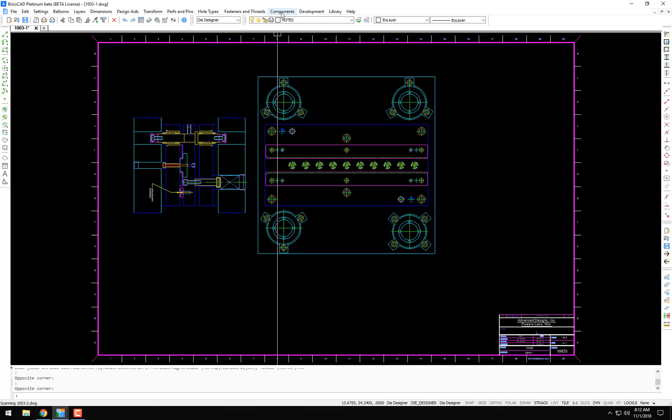I did an earlier video using die springs, and this is similar, but Lee springs certainly have a different function than a die spring. So you can find Lee springs in the components menu, scroll down to Lee springs, or type LEE at the command line.

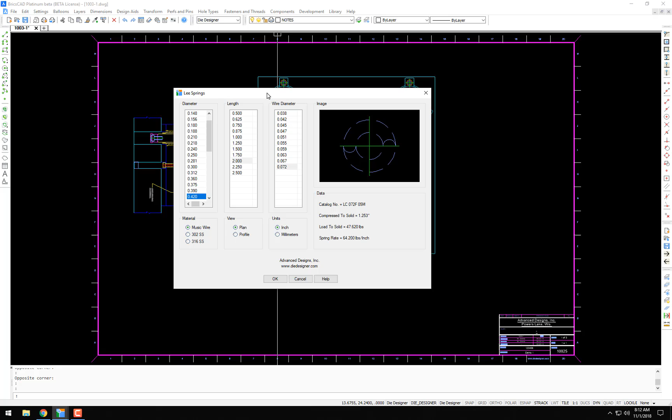That opens the dialog box. Just to run you through this a little bit, we have our various diameter list, our length list based on the diameter selected, and then our wire diameter. A 059 is going to give us a little more spring force as opposed to the 026 wire diameter.

So your views - currently we're in the plan view. If we were in the profile view, you'd see this change to the profile. And the data information over here is based on the spring you select.

It spits out your catalog number, your compressed to solid height. So this is a 250 length - let's go with a longer length here. You'll see it compresses that 1 inch long spring, compresses to 317 to a solid, and the load to solid is only 3 pounds, and the spring rate is 4.2 pounds per inch of compression.

We also have a few material types: music wire, the 302 stainless, and the 316 stainless. We'll just stay with the music wire.

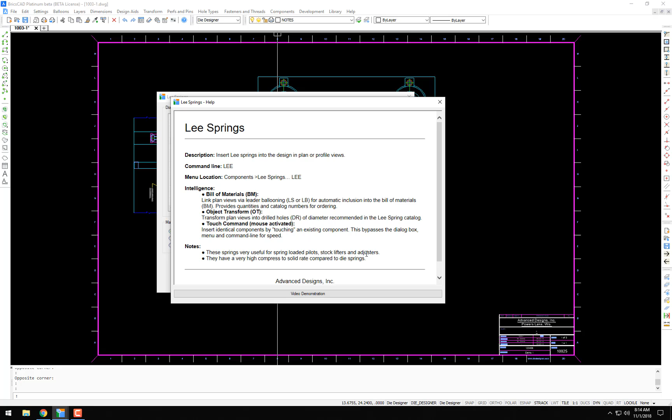A couple notes: these springs are very useful for spring-loaded pilots, stock lifters, adjusters, where they have a relatively lighter force compared to a die spring. But where you don't need that force, but maybe you need a lot of travel, these come in real handy.

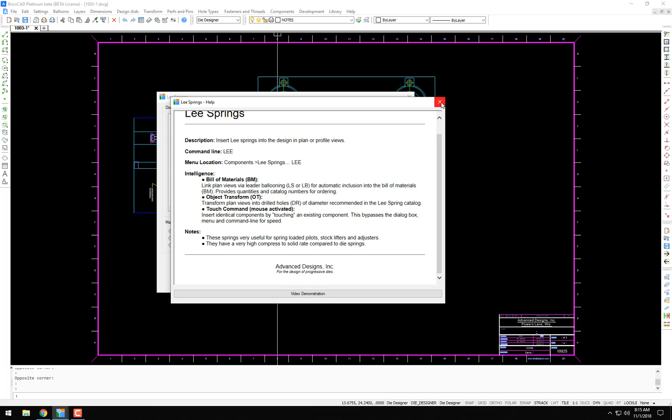Also, we have a video demonstration button, which will bring you to this YouTube video should you care to watch this video again. So let's get started. I'm going to cancel out of here.

I'm going to start in my profile view. What I am going to do is I have a pilot lifter already drawn in with a unified screw plug or screw cap behind it. I'm going to use a Lee spring for this.

So first, let me get a dimension here. We got a 453 tap drill size on this unified, so we need a spring smaller than 453 diameter. So, Lee.

Let's scroll down to, let's go with the 420. Let's just start out with a 2-inch length. I don't know what that'll be, but at the insertion time we can change that.

And let's take a look at our wire diameters. Let's go with the 059, and we're going to put it in the profile view. Click OK. Spring insertion point, I can either snap to the center of the unified or snap to the center of the bottom of this pilot spoolie.

Compressed length, that's from the menu, but we don't know. We're going to just bring it right down to here and draw it in.

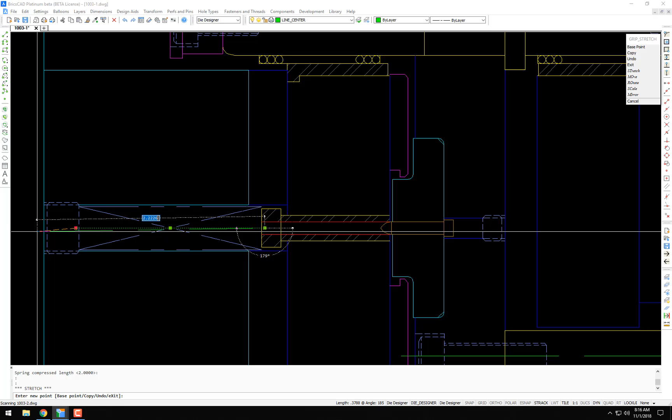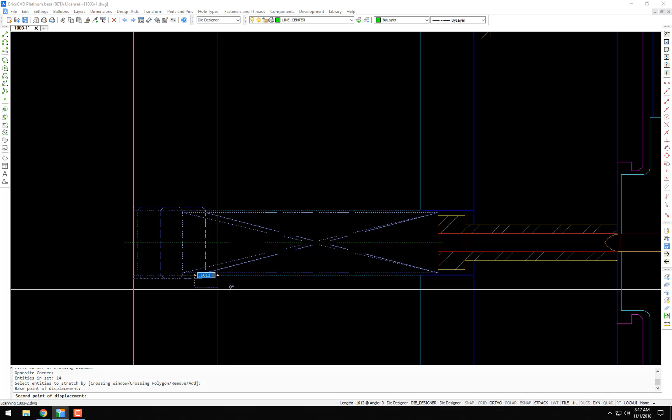So let's see what this length is here. This is 1783, plus the 1/8 inch of preload, plus the travel. So we're pretty good there for a 2-inch spring. I could certainly stretch this and adjust this accordingly, but I think we're really good there.

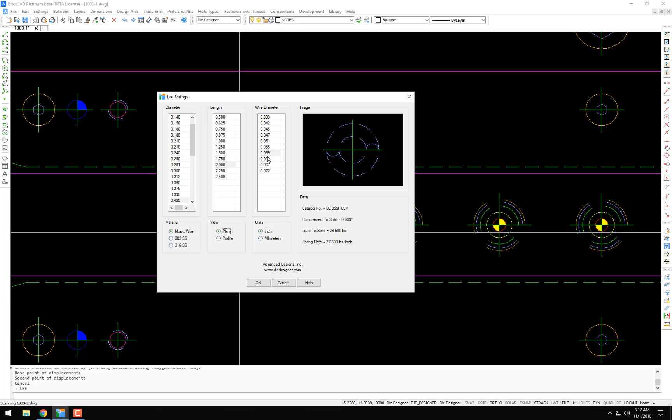So based on that, we're going to go over to our plan view, start Lee spring. We're going to go to the plan view, and you can see the 420, the 2-inch long, and the 059 wire, and we're going to insert it. So yeah, kind of cool there.

I can use the touch command, just put the cursor over the spring and click a mouse button and pop them in. Let's see here.

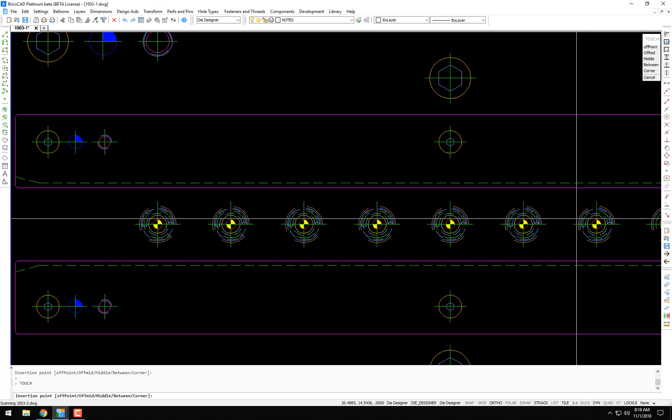Now they're drawn in. I'm going to quickly put one of these Lee springs in behind this spring-loaded stub pilot. So I'll get a dimension: 201 tap drill size, and 285 and 5/10.

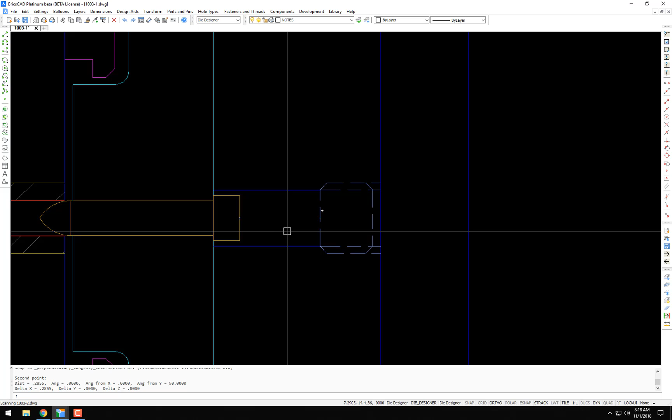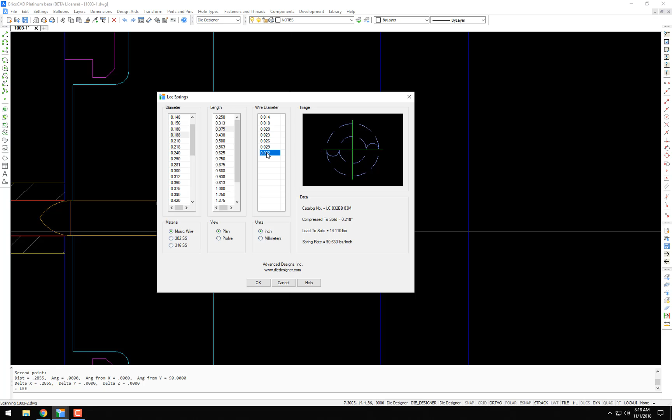Lee, what did I say that was? 201. So we'll use a 188 diameter spring, and let's call it 375 long. Let's make it as stiff as we can. Compressed to solid at 218.

All right, let's draw this in the plan view real quick. Snap to center, snap to perpendicular. Yeah, and it draws it in. Let me see what that length is. 285.

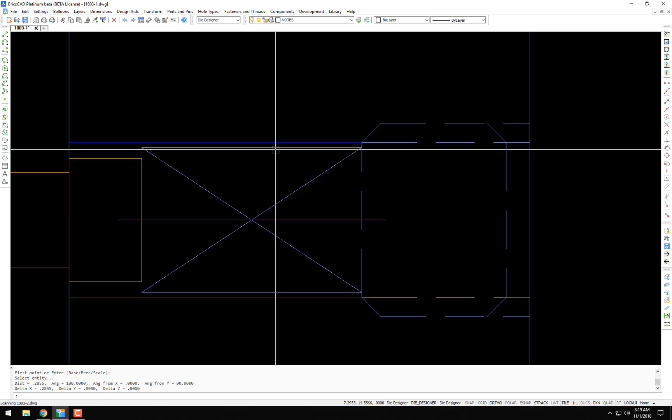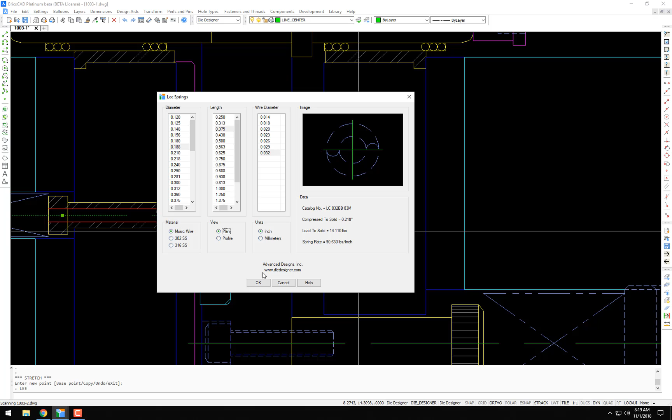So I know our compression's good on that. Just a little cleanup here. So now I could put it, if I was on the top view where these pilots are, which I'm not, but if I was, then I could just pop that spring in behind the pilots and the set screw.

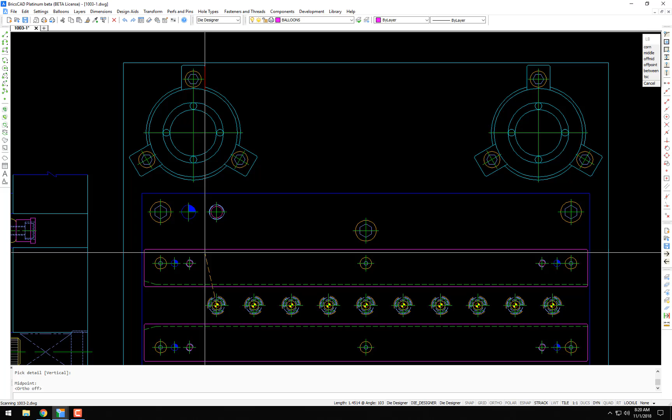So let me do a quick ballooning of this to show you the bill of materials information. We'll go to leader balloon, use our split leader balloon, starting with balloon 1. I am going to detail all 3 of these components here.

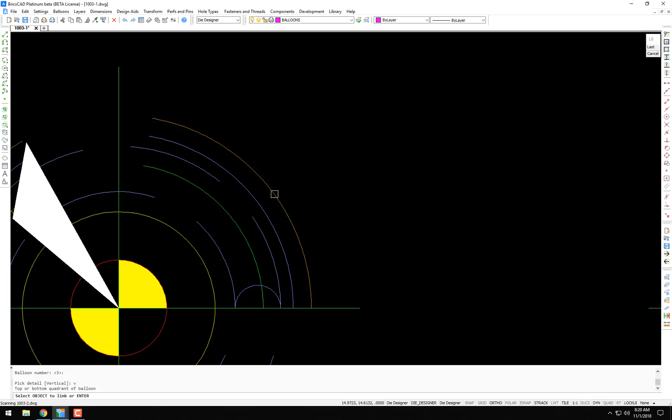The pilot spoolie, which I'll select now. Vertical option. Now I'll select the spring. Vertical option. And now I will select the unified screw cap.

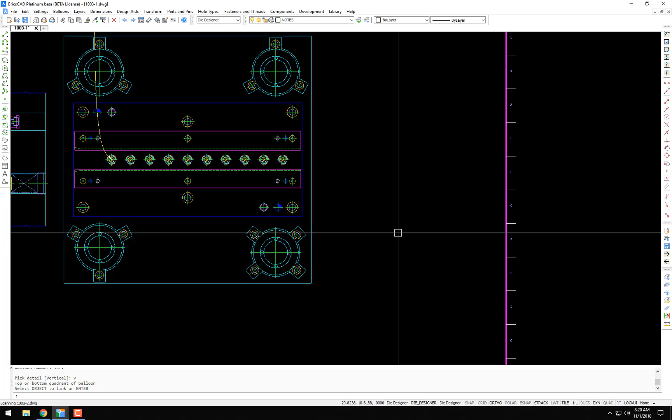So now I could run my bill of materials. Yes, I would. I usually don't balloon until the design is approved and ready to detail. Then I would balloon the entire design, and then I would detail, then run the bill of materials program. But for this video, we're doing things a little out of order.

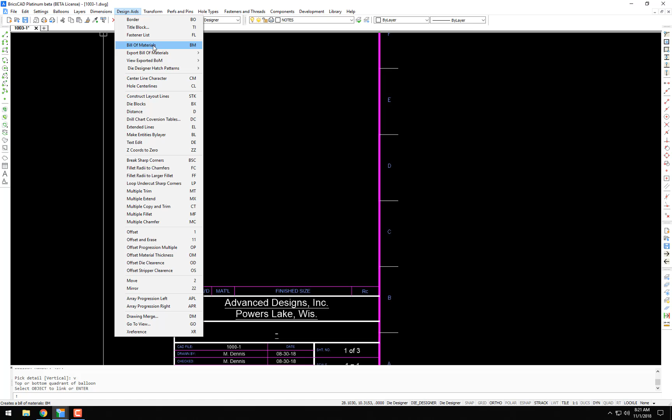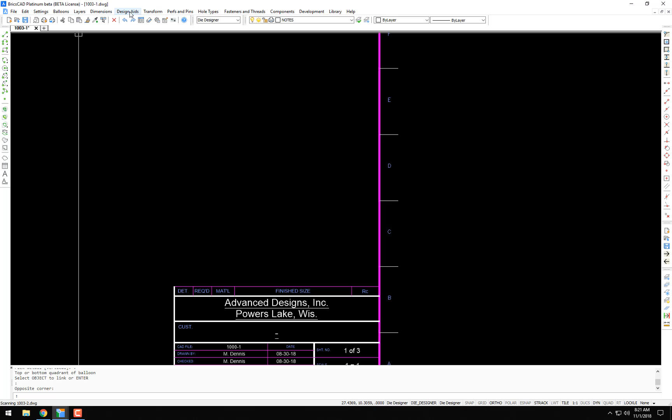So to run the bill of materials, go to Design Aids, Bill of Materials, or BM. If this is the first time watching, once I click Bill of Materials, it's going to happen real quick, and it will fill in all those ballooned items. So BM, yeah, and there you go.

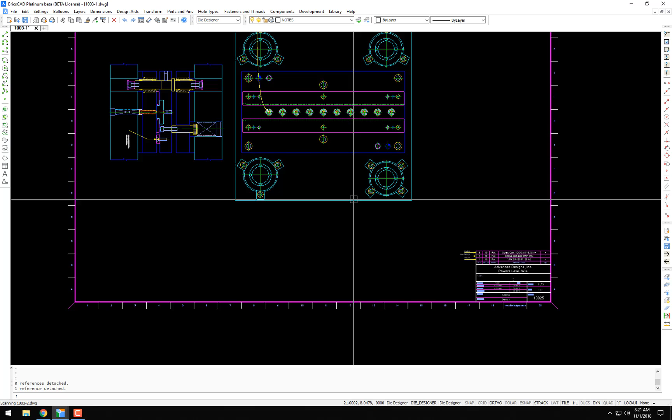We have our Dayton spoolie lifter, catalog numbers, 10 required. Our Lee springs, catalog number, 10 required. And then our unified screw plug, or screw cap in this case. The next video I do is going to be on the screw plugs and screw caps.

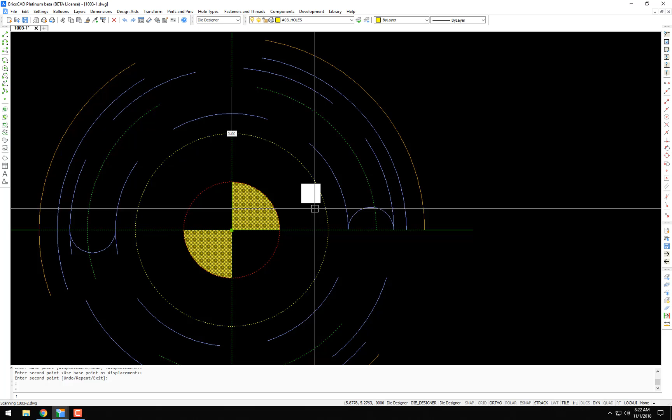So yeah, kind of cool. Let me show you one other thing real quick. I'm going to copy this guy down here. Now, do you see how between the pilot hole, the spoolie bushing, spoolie lifter, the spring, and the unified, it's basically 4 items there.

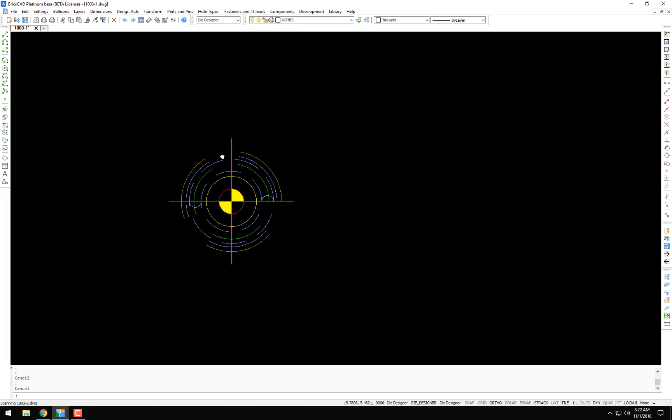I can clean this up and make it look prettier. I would like to have the spring information, but I don't want to look at the spring. So this is kind of neat. We can go to Object Transform, something I have not shown yet in any previous videos, where I can make a group out of a bunch of single objects. So I can group the objects, or OG.

A couple prerequisites: select objects to group in the order to appear in the bill of materials. So the first object will be the pilot spoolie. Whoops, hold on one second. The pilot spoolie, then the spring, then the unified.

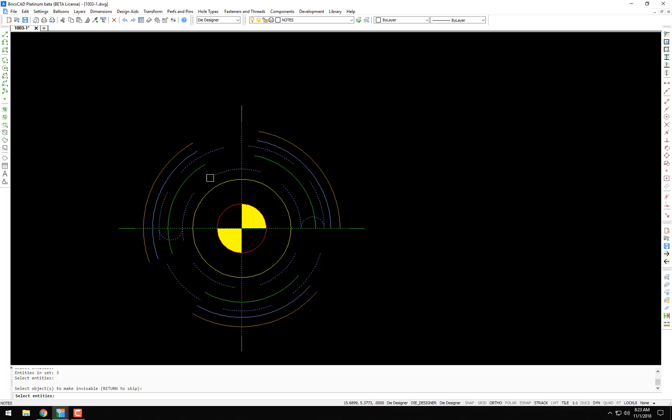And now here's the option: make it invisible. So I am going to select that spring, and the spring disappears, but yeah, we got a little cleaner look. And then I'm going to show you something else with the ballooning on this.

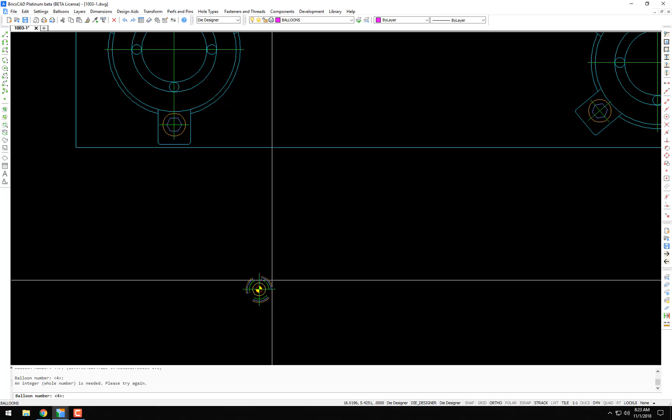We'll go to our split leader balloons, and because it's a group object instead of a single object, I do not have to select this. So just watch, it'll put 3 balloons up real quick. Snap to the center, draw our balloons. So we got 4, 5, and 6.

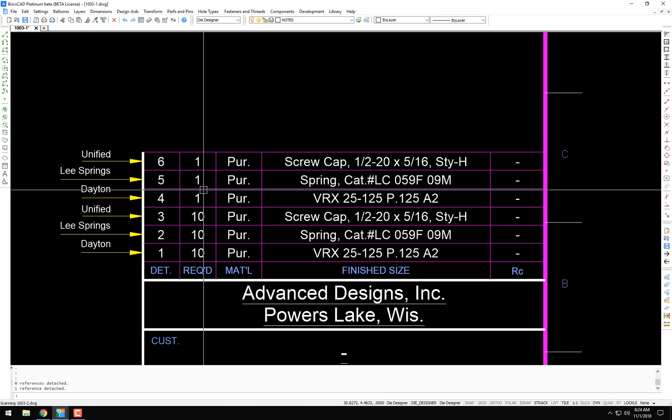Now if I erase this and go to Bill of Materials, you can see it found one instance of this, because I only created one instance of this group. And you know, I really use this object grouping just to make it cleaner.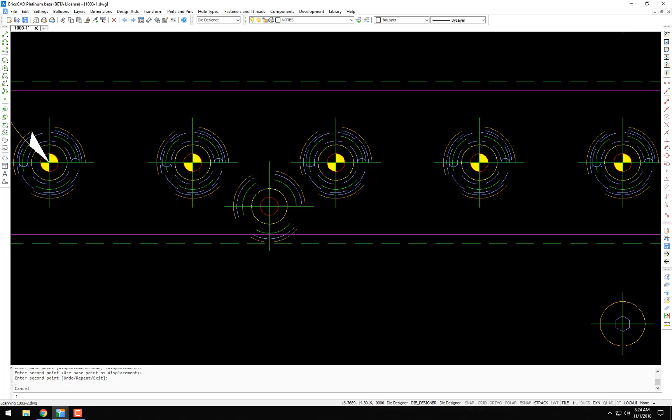Once again, if I were to copy this over here, you can see that's a lot cleaner look than, you know, what am I looking at there? It just gives a nicer appearance. So that's a nice use for that, object grouping.

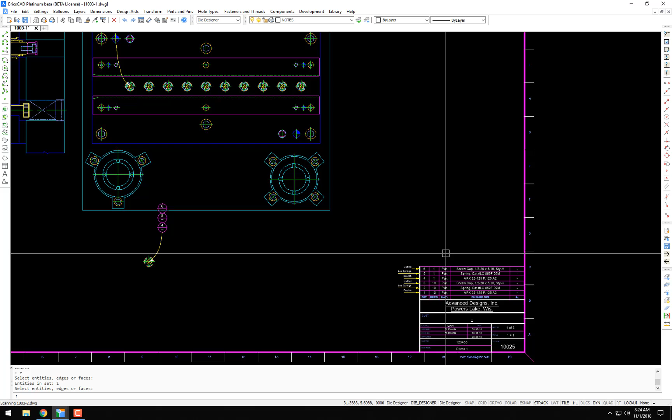And yeah, thanks for watching. I hope you find this informative, intuitive, because it should be intuitive. It should be easy. We should be spending all our brain power on getting a good design and not worrying about components and how to place them, where to place them, and all that good stuff. Thanks for watching.